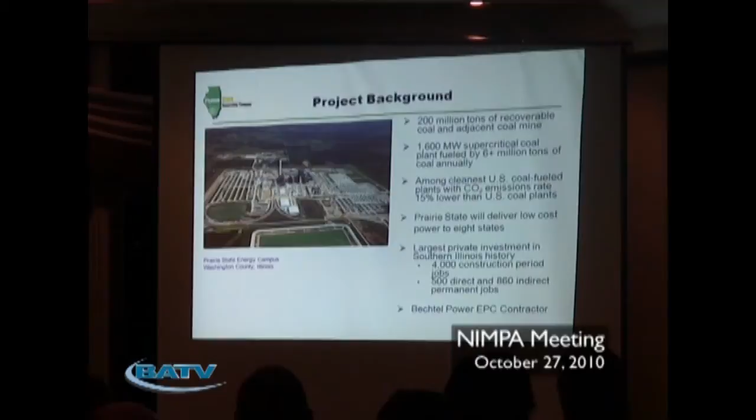As you all know, this particular plant is located in southern Illinois, and there are about 200 million tons of recoverable coal adjacent to the project. And like Mike said, it's a 1600 megawatt supercritical coal plant. It's fueled by 6 million tons of coal annually. And by the way, about 30 years worth of coal, we already bought it and paid for it, so it belongs to the project. So 30 years worth of coal is at locked-in prices, except the mining costs, whatever labor we need to pay, but otherwise the reserves cost itself is locked in.

And it's the newest power plant, and that means the EPA and others made sure that we use the latest, best available technology for taking care of the pollutants: sulfur dioxide, NOx, mercury, and then also the carbon itself. The only thing which we are not doing here is the CO2.

There are no technologies for CO2, and CO2 was not even considered a pollutant until recently. Even now, there's a lot of debate going on in Washington. What do you call CO2? Is it a pollutant or non-pollutant? But that's a debate for a different day.

Prairie State will deliver low-cost power to 8 different states. We got the partners. In the beginning, when we started talking about 10 years back, we thought that maybe about 70 to 75% of the project would be owned by Peabody, a coal company which was trying to build it in the beginning. But as time went on, things changed. I think 95% of the project is owned by public power, customer-owned entities.

This is the largest private investment in southern Illinois history. And actually, I think in 2009, this was the biggest construction project in the country. Not just on the power side, not just the electric utility side. It was the biggest construction project in the country, employing almost 3,000 to 4,000 people. When President Obama and others, in the unemployment time period, were injecting money to create employment, in Illinois it's created by 8 different states.

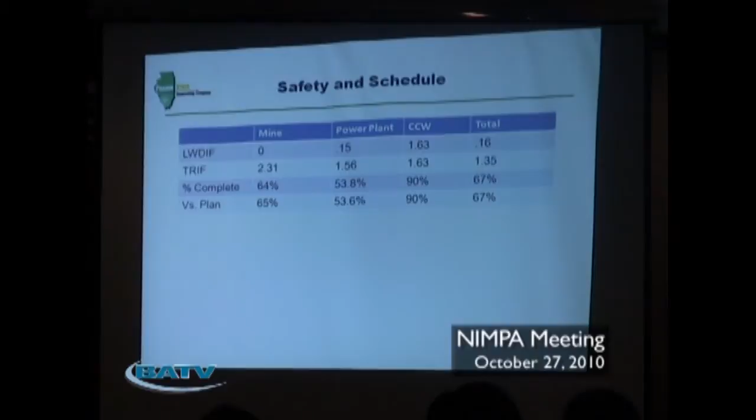Thank you. Starting from the high level, talking about safety and schedule, if we dissect the facility into the mine, the power plant, and the CCW management facilities, I have some statistics in front of you. Basically, from a safety perspective, the entire facility is being constructed with world-class safety statistics. I'm most proud of a couple of key points. The mine, since we started construction in summer of 2008, has been constructed without a lost workday.

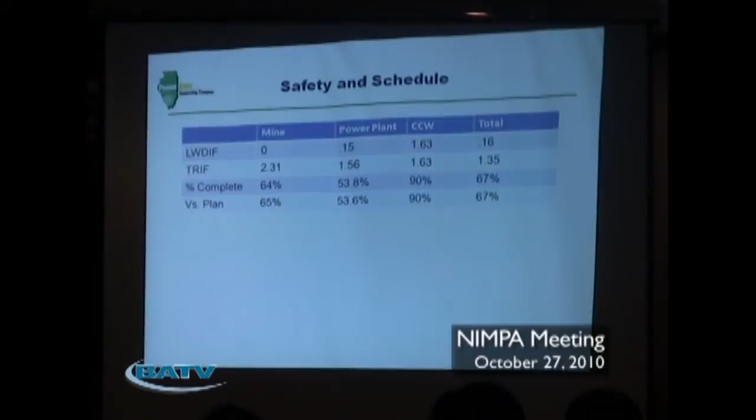The power plant, I'm very happy to say that Bechtel, under their leadership, they are approaching 5 million man-hours worked consecutively without a lost workday. They're at about 4.7 million man-hours consecutively worked, about 12 million man-hours total worked so far. And throughout the project, their statistics have been outstanding.

Their lost workday injury frequency of 0.15, that's against an industry average of approximately 2.0, so that's significantly less. Even the less intense injuries that are classified as recordable injuries, like someone has to see a doctor for an injury, get a stitch, or those type of things, their recordable injury frequency is running at a 1.56 against the industry standard for heavy industrial construction of approximately 6.0. So very good job there.

Our CCW facilities, our coal combustion waste management facilities, our landfill, are also being constructed, while not as labor intensive, with excellent safety. We've had one lost workday, and that was a contractor's employee who succumbed to some heat exhaustion symptoms and had to be treated by a doctor and couldn't come back to work right away. But I'm happy to report that employee is fine. So in total, the project that you guys are part owners, NIMPA's part owners, is being constructed safely.

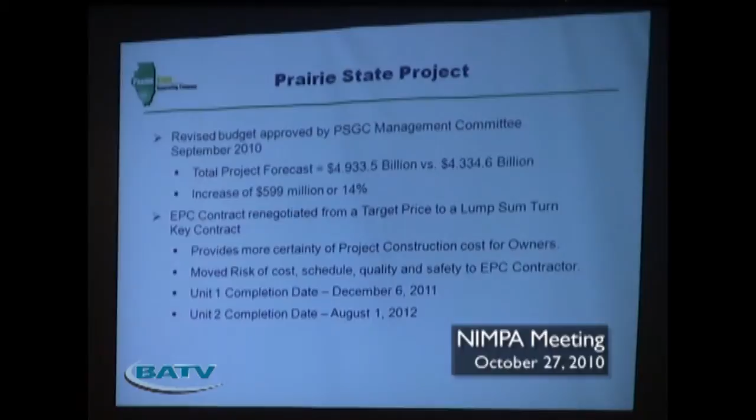The owners had all the cost and schedule risk, to a lump sum turnkey terms where now Bechtel has a lot more risk, and we think the risks are being appropriately redistributed when you look across the key points of the project. Mainly your interest is safety, quality, schedule, and cost. Those risks have been redistributed and the appropriate guarantees are in place as well. And so from an owner's perspective, it'll provide more certainty in project construction costs, and we move the risks of schedule, costs, and quality entirely to Bechtel. And in that agreement, we successfully preserved the completion dates that were in the original agreement of December 6, 2011 for Unit 1 and August 1 of 2012 for Unit 2.

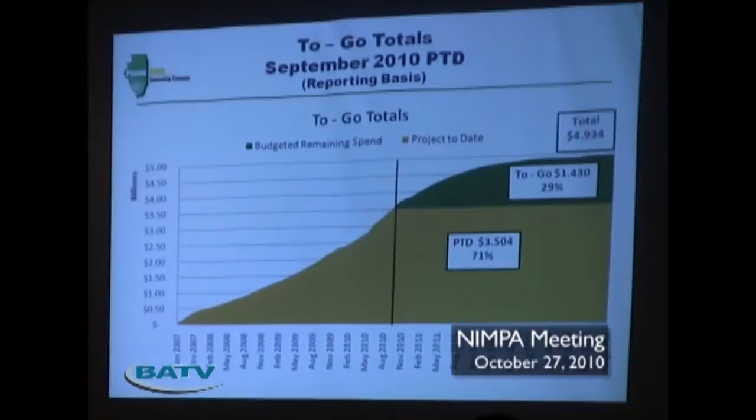And where are we in the project? If you just look at the cash flow curve for the project, and I was being asked about what are remaining risks in the project versus a lump sum turnkey. Of the 4.934 rounded projected budget or forecast for the entire campus, we've spent approximately $3.5 billion of that, and we have about $1.43 billion yet to go through the capitalization period of really late August of 2012.

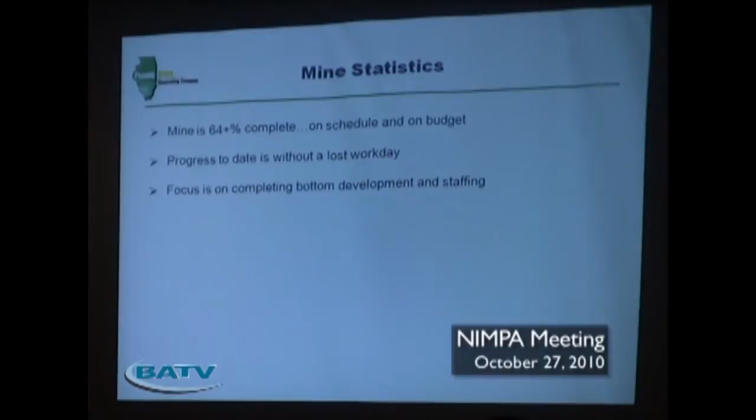Let me talk about the mine. As I showed you earlier, the mine is about 64% complete. It's on schedule, and it's actually under budget versus our original budget of 2008, and then more so on an apples to apples comparison on scope changes in 2009. It's under budget. And progress to date, again, as I said, has been without a lost workday. It's just outstanding. Our focus is completing the bottom development portion of the mine, or the underground construction work, and then obviously staffing.

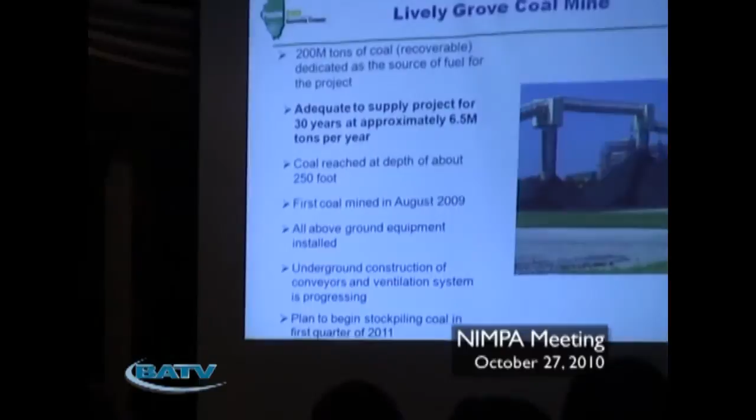This is a recent picture of the surface part of the mine. You've got 3 stacking tubes here, and we have about 300,000 tons of live storage capacity at the mine. As Raj said, the owners own the coal. That's a wonderful position to be in. You're not exposed to fuel, which is the largest variable cost in power production. You're not exposed to market derived pricing for fuel or the derivatives, like fuel adjustments and fuel adjustments for transportation.

The owners own a total of about 400 million tons of coal, but the way we're going to mine it, with room and pillar mining or continuous mining, will actually recover about 50% of that. And that 200 million tons of recoverable coal at a forecast usage rate of about 6.5 million tons is enough for 30 years of operation of the adjacent 1,600 megawatt power plant. The coal is at a depth of approximately 250 feet, and the seam is also ergonomically positive. It's a 6.5 to 8 foot thick seam.

So that means most people don't have to walk around bent over, except for Gary from Batavia.

The first coal was mined in August of 2009, and as I reported in September of 2009 to our management committee and some of the other owners, I was very pleased to see that we did find the coal. It was actually down there, so that's a good sign. All the above ground equipment is installed, and as I said earlier, our focus is on the underground work of installing conveyors, air shafts, and basically air ducting.

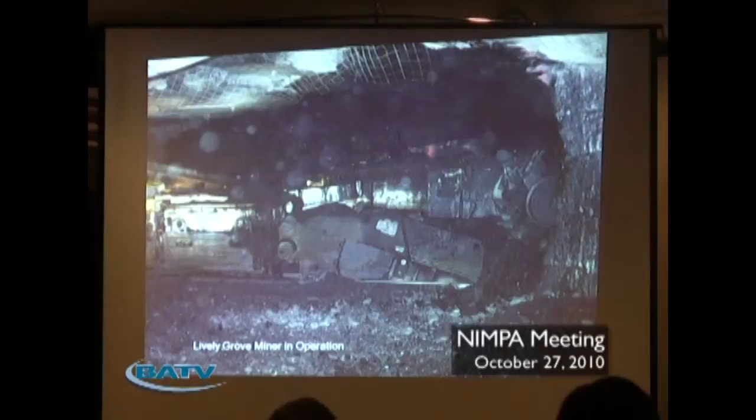This machine is about 37 feet long. It's about 11 feet wide. It can cut from the ground up to about 12 feet high, and it weighs approximately 75 tons. And there's 10 of them. They're big machines. They're actually quite exciting to see work.

There's roof bolts spaced, I believe, every 3 feet, and the screen already installed. And then where he's bolting a new area, the screen's already up there. He's standing under this hydraulic shield so that if a chunk of rock or coal was to fall off that part of the roof, he would be protected. And the same on the other side.

How this works is, first there's a hydraulic arm with an actuator on it that will spin a drill bit. The drill bit's hollow, and he'll drill a hole up through whatever remaining coal seam there is into the rock. We have a nice limestone and then shale roof, very strong to bolt into. And then he'll put a package of epoxy resin in there, and then run the bolt up in there, spin it, and it'll lock it in tight. And that glue will set in about 30 seconds.

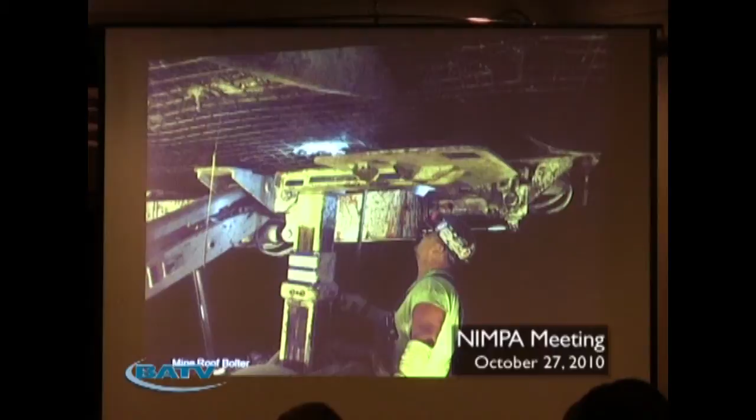This is a picture of the mine from early construction. We don't have the actual date stamp on it, but I can tell you from experience it's probably in July when we did the clearing and grubbing of the mine site. There's about 200 acres in fence at the mine. So I'm going to show you a series of progressive photographs over the last 2 years. This is a picture from August of 2009, so a year later you can see the progress that was made.

How we get down to the coal seam is via a slope. It's 2 levels. The bottom level is, I think, 12 feet tall, 22 feet wide, something like that, and is where we'll drive equipment and people in and out of the mine. The upper deck is where the conveyor is that hauls the coal out of the mine. That slope is at an 8-degree angle to the horizontal. It's about 1,645 feet long to get from grade down to the coal seam, 230 feet deep at the area where the slope is, where we call the 0 point.

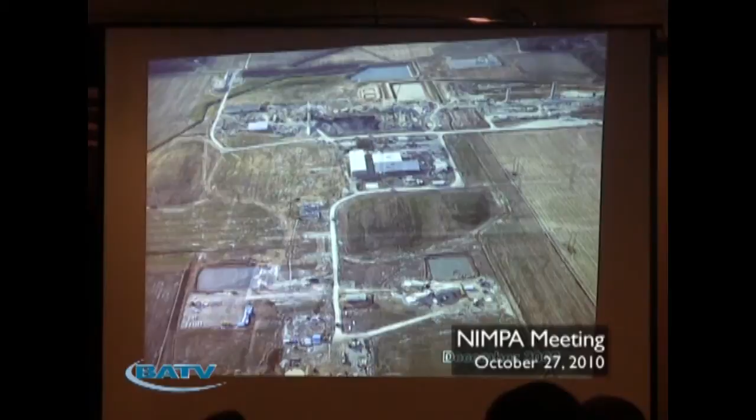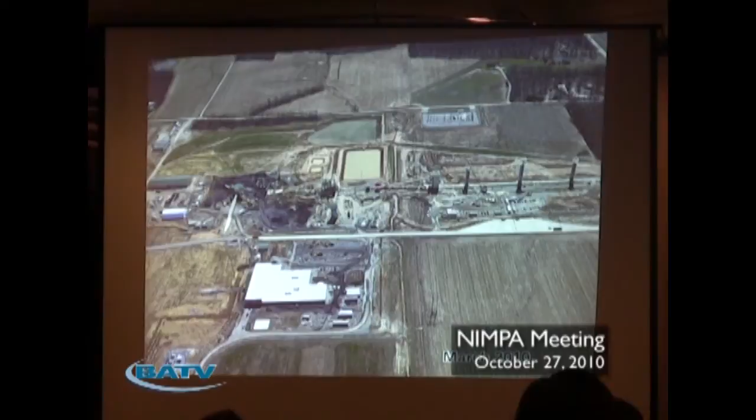By March of 2010, the office building's about done, and you really can see the surface work starting to take shape, and they are about done now. We're still mining coal as we're doing the surface and the underground work in parallel. And then August 2010, or currently, you can see the surface work is done. Just have to do some fine tuning, startup and testing.

The office building, which is primarily the front part here, with lockers and showers, and the warehouse and maintenance shop over here, is done. It's about 60,000 square feet. So that's a little overview of the progress of the mine over the last 2 years. And now I'm going to take you on a little tour of the power plant, what it's going to look like when it's done.

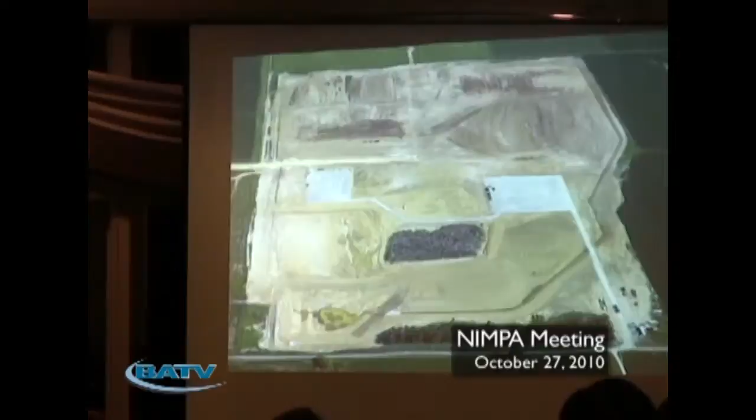Oh, no, that's not good. Oh, sorry about that. I swear it was working earlier.

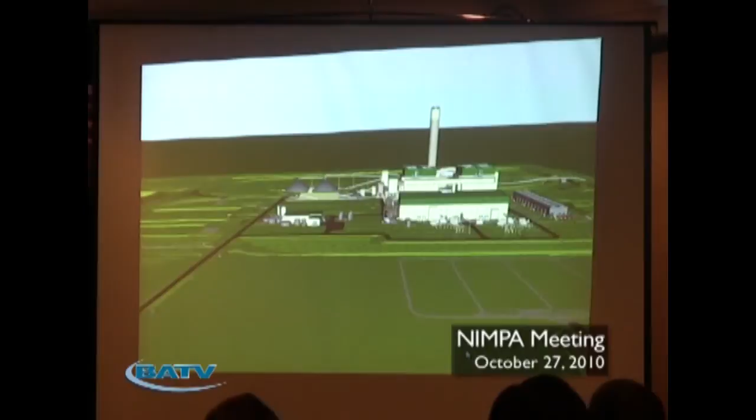Here we go. This is a 3D model, the Bechtel design model that was actually used as the power plant was designed, and for them to design construction sequencing. For those of you that came on the tour, you're entering the main entrance of the power plant along the south road. Inside the fence at the power plant, we have about 500 acres. Immediately in front of you, you can start to see the size of the live stockpiles of coal.

We'll have about 5 days live storage capability in the power block itself, and about another 60 days of what we call dead storage capacity at the power plant. Right in front of you is our raw water treatment plant. We'll have to treat over 25 million gallons of water a day that's used in the steam generators, but primarily used in the cooling towers.

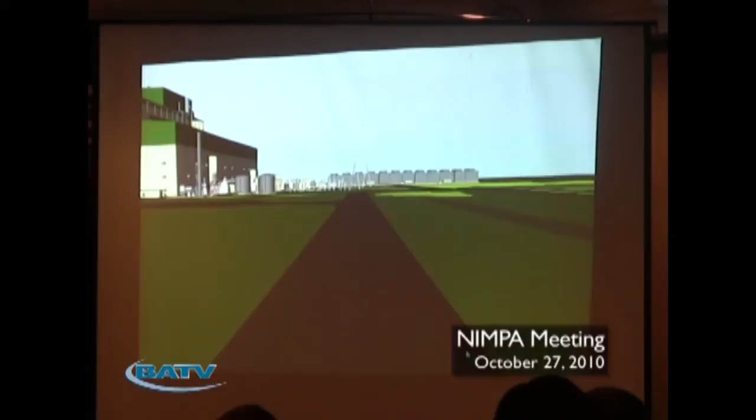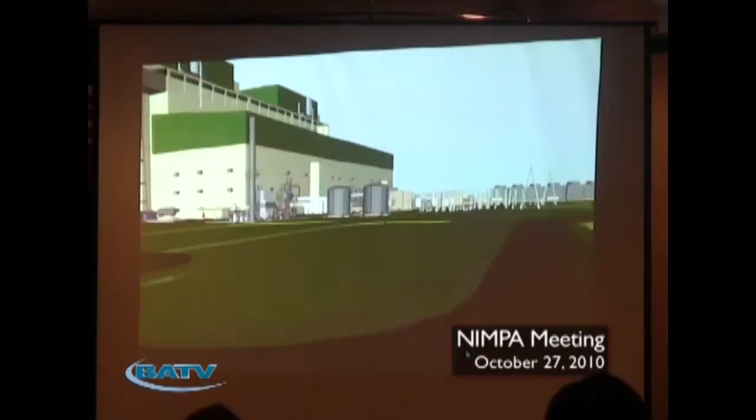So as we turn and look to the east, you can see the Unit 2 cooling tower here. And just for those of you who've been on a tour, it's about the size of a football field. There's 24 huge fans that'll serve for the air to water heat exchange process. You got to look at the power building itself, and these are demineralized water storage tanks. There's over 8 million gallons of storage capacity tank work on the site.

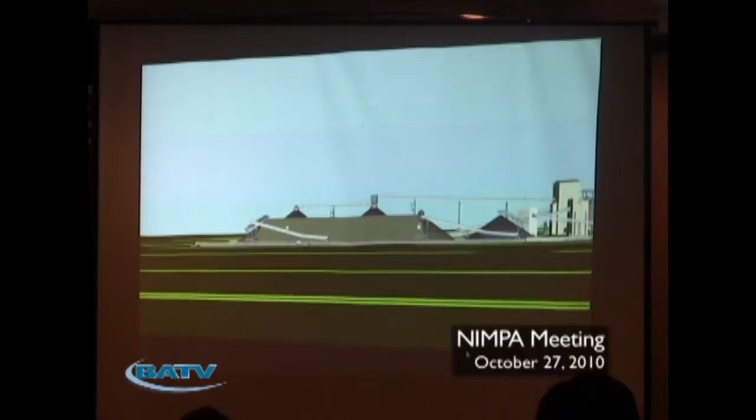As we look to the north, you can see more of our material handling area of the plant. It's quite big. This is the CCB pile. It's the coal combustion byproducts, bottom ash, fly ash, and gypsum from the desulfurization process. When burning 20,000 tons of coal a day, we'll produce about 11,500 tons a day of this product that'll be hauled off in rail cars, about a unit car train a day. These are chemical storage tanks, lime, acid, caustic, to be used in the water treatment process.

We're looking to the west. This is the raw water pond, and that's the pump house. It's about 67 acres on the surface, 55 feet deep, about 45 acres at the bottom. It holds enough water for 30 days, or just under 800 million gallons. It's a registered impoundment with the EPA, and so, for some reason, the Bechtel people call it a dam pond.

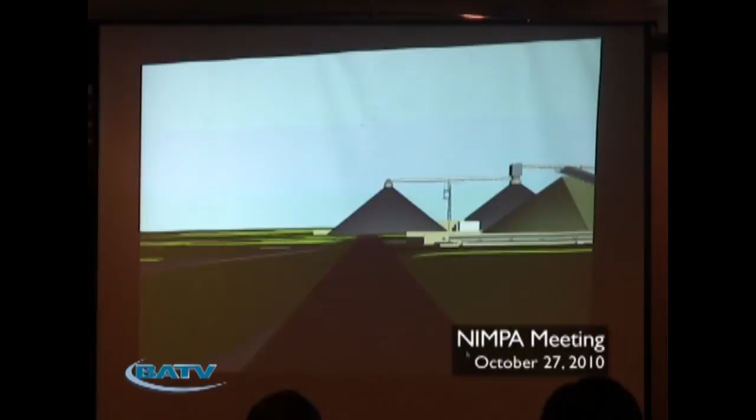We're heading north a little bit more, and you can see this video is a little finicky, so we can't go too fast, otherwise it makes us all dizzy. Most importantly, it makes me dizzy.

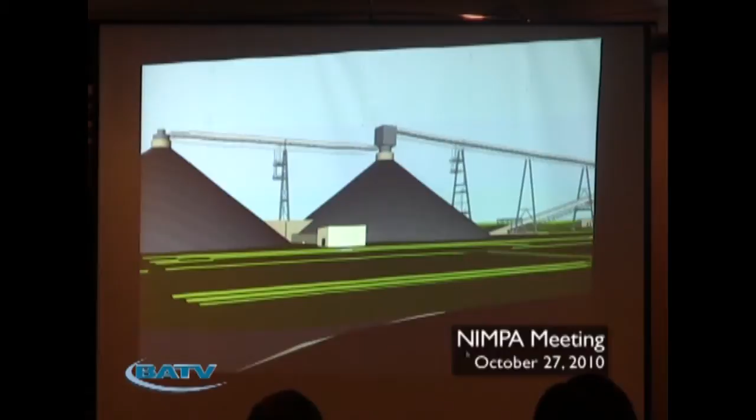Coal storage pile, reclaim tunnel, about 5 days of coal storage there, where about 2/3 of it can be reclaimed automatically via hoppers located in the ground here. Looking back to the east, we're going to go by the ammonia storage tanks right here. We're going to use anhydrous ammonia that's part of the selective catalytic reduction process to remove nitrogen oxides from the flue gas in the selective catalytic reduction, or the SCR.

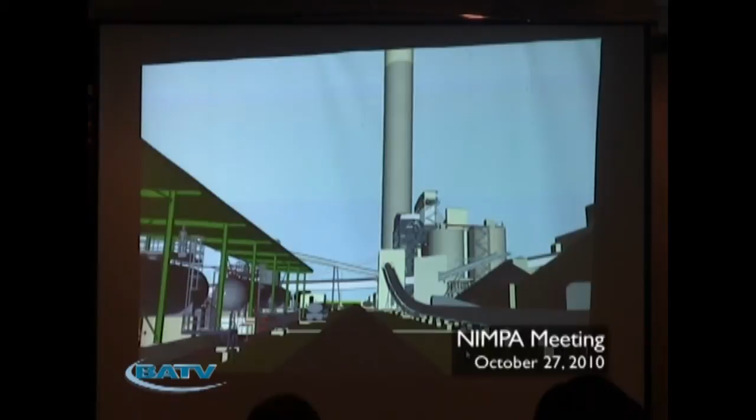Again, the material handling parts of the plant are substantial, and this is just to give you a perspective on the size of the awaiting CCB pile. They even test the operability and maintainability by drawing in operators and maintenance folks. We'll use about 1 tanker truck full of anhydrous ammonia per day.

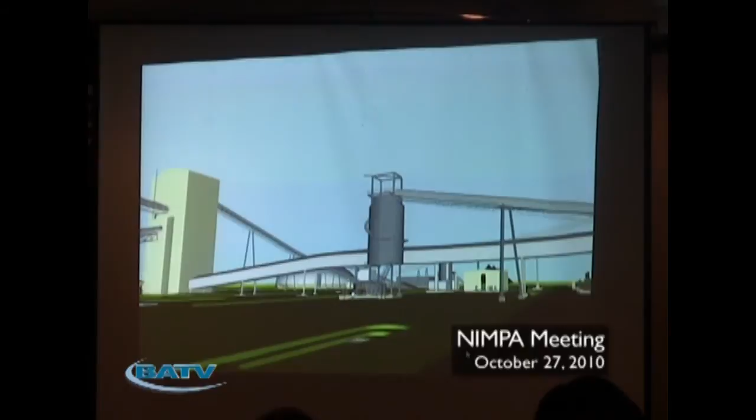Again, we're going to pan east, northeast. That's our limestone storage dome. So it's weather protected. We have about 5 days of storage of limestone on site that's used in the desulfurization process. We'll use about 750,000 to 1 million tons of limestone a year. That'll come in by rail, a few cars at a time, about 3 to 5 a day, and we'll unload it via bottom dump right here in this building.

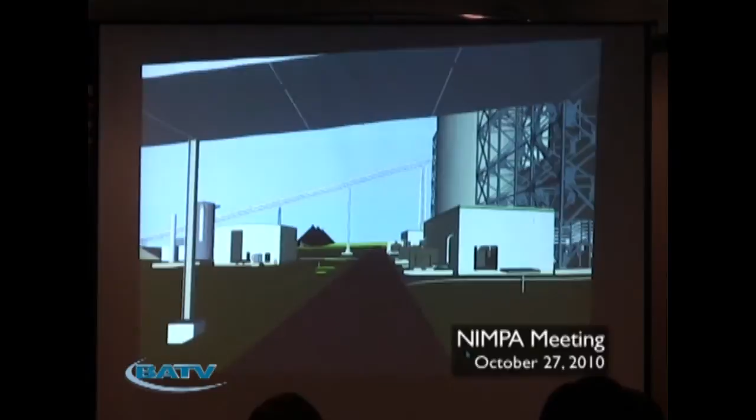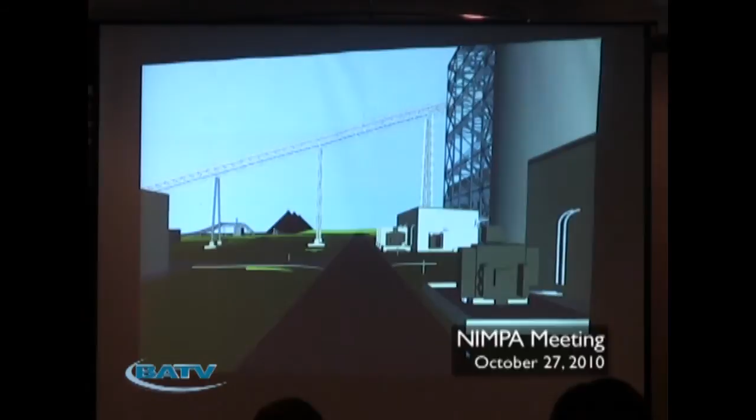As Raj talked about earlier, one of your advantages is the coal mine. You own the coal, you own the mine. Your variable cost of production of coal is well under market, and you're not susceptible to market driven pricing. You're not susceptible to being held hostage by transportation organizations, etc. Because the mine's located literally across the street from the power plant, and the coal will be transported across by a single conveyor with a capacity of about 2,000 tons per hour.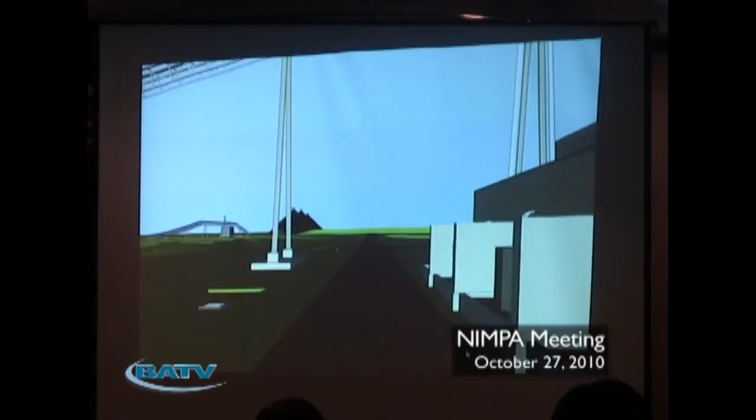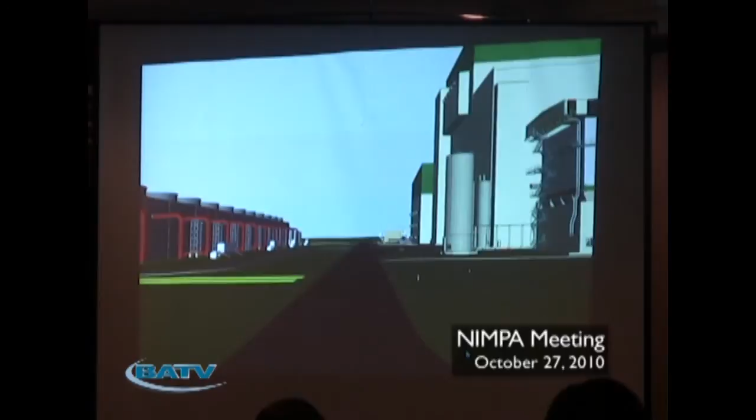Now we're going to turn and head south, and you're going to get a picture of the size of the cooling towers. This is the Unit 1 cooling tower. You can see that there's 12 risers there, each feeding a section with fans over 35 feet in diameter. Again, that's the size of a football field.

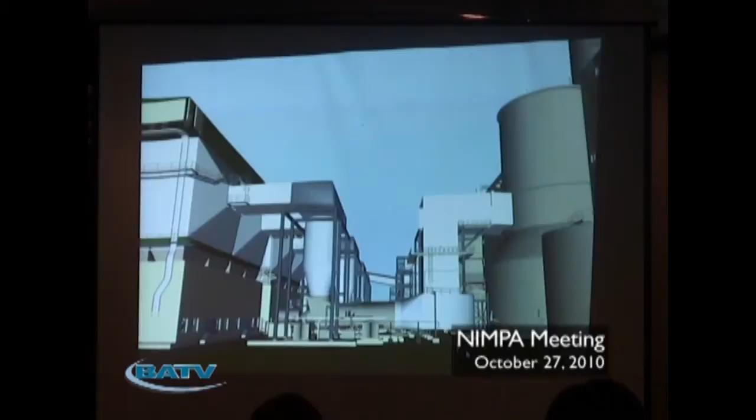The air pollution control equipment on the plant takes up over 50% of the power block, and it represents over $1 billion in cost. And this is what it looks like in the 3D model versus the rest of it. This is the electrostatic precipitator, the dry electrostatic precipitator. This is the wet scrubber, and the wet ESPs up on top. And you can't see the SCR, but it's in this building here, and it's close to 200 feet tall.

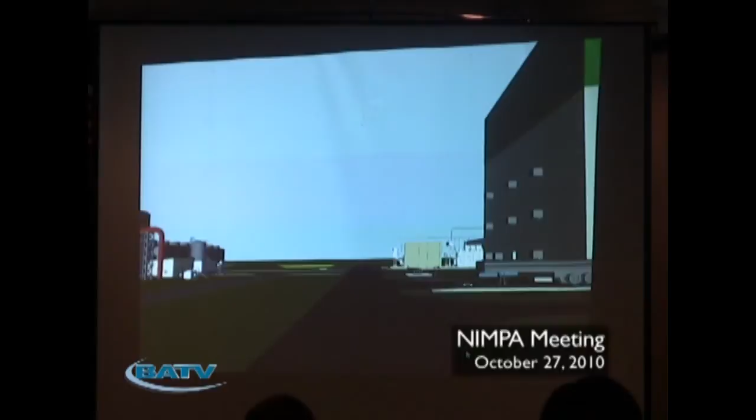And as we proceed along, this is the east side of Unit 2. I think I'm very happy as an operator as well that we have a spare main step-up transformer that the owners had the insight to purchase. There's many stories of plants going down for extended outages due to premature electrical failures.

Each of those transformers, the three main step-ups, and then the two generators, one in each unit, weighed in between 400 and 500 tons, and they were transported via heavy haul from the Kaskaskia River with a temporary port about 14 miles away. That haul took 2 days to go 14 miles.

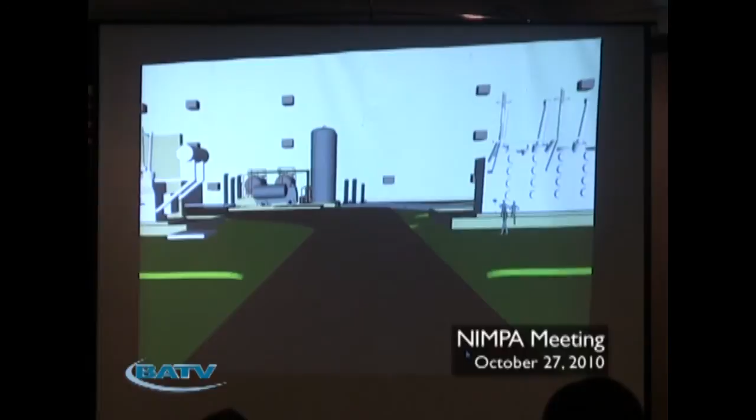You can see the switch yard, and I'll give you some more details about the transmission work that was done, but the switch yard is essentially done, and these are the step-down transformers. We generate at roughly 24 kV. That'll step it down to 4 kV to backfeed the plant. We'll use about 8 to 9% of the actual generated electricity to feed the plant.

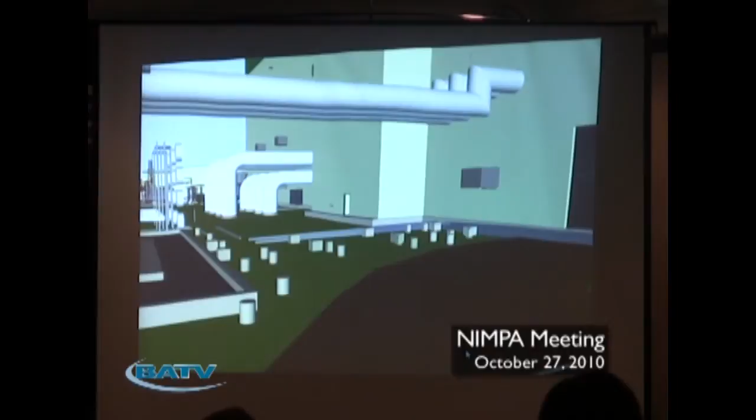You can see the circulating water risers. These are 6-foot diameter fiberglass pipes being fed. The underground pipes are 11-foot diameter steel reinforced concrete. Now I'm going to take you right into the turbine bay, and this is actually a maintenance door. You can see the tractor trailer parked there to simulate being able to haul something out of the lifting bay.

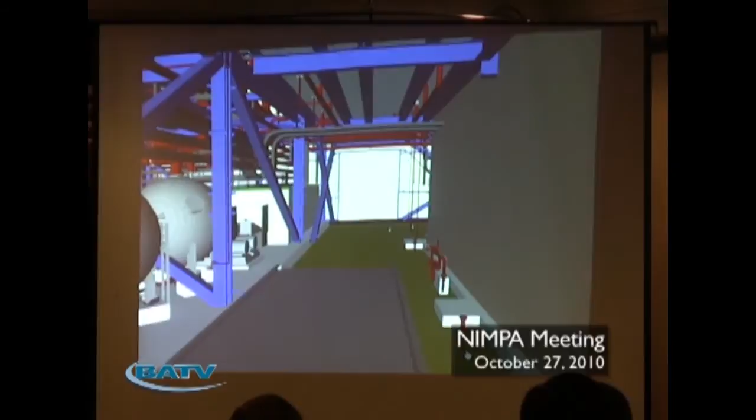We're a supercritical thermodynamic cycle, 3,800 pounds pressure on the boiler. Throttle conditions are 3,800 pounds, 1,054 degrees Fahrenheit. Running at that higher pressure means we need ultra clean water. So we have full flow condensate polishing, which were the 3 domes that you saw just as we passed in.

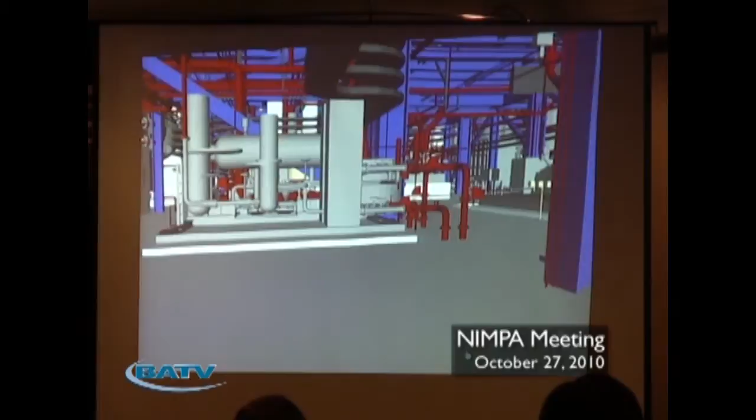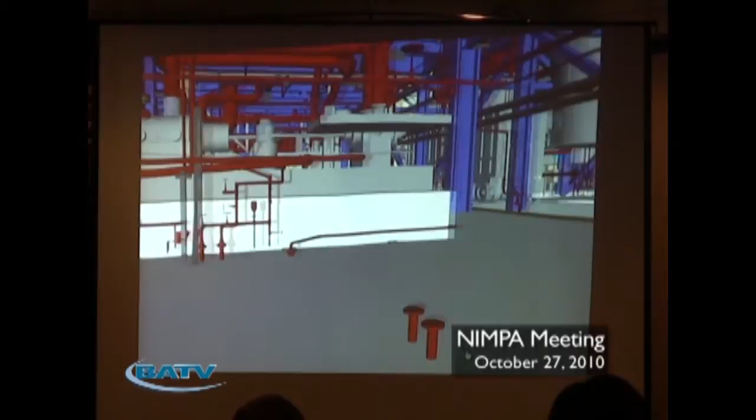Stator cooling water pump for Unit 1, and this is just a little startup boiler feed pump for Unit 1. It's an electric driven, several thousand horsepower motor. That's good for about 30% load, and there's one each for each unit. These are the turbine driven boiler feed pumps. They have an integrated lube oil skid. There's 2 of them per unit. Each is good for 50% load. And if you were to couple those steam turbines to generators, they produce in total about 30 megawatts per unit. They're big pumps.

There's Mike checking up on us. Look at that.

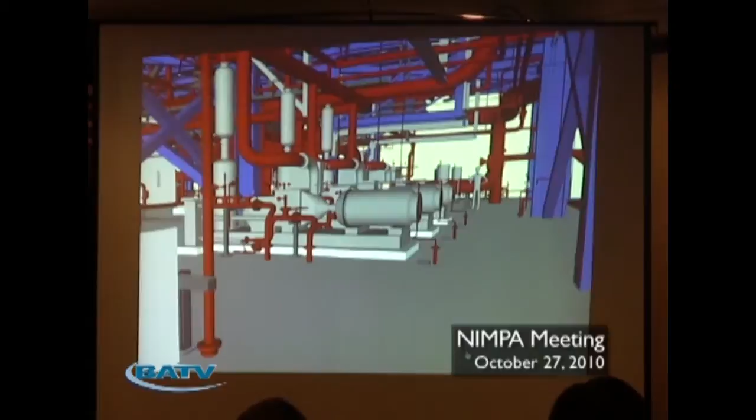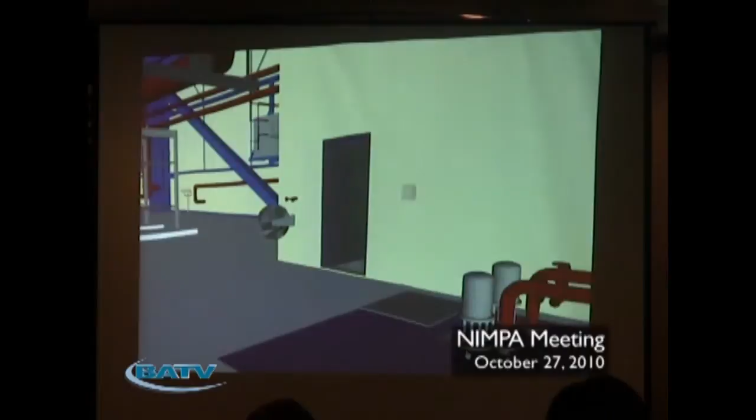And here's our vacuum pumps, Unit 1. So where we need assistance getting a vacuum off the condenser, we have 3 pumps to do that. Closed cooling water lines for cooling water systems, and then we'll see a plate heat exchanger, and then we're going to take the elevator up onto the turbine deck. Up we go.

I don't know if you noticed, but earlier on we passed a couple rooms, and you notice the model actually shows the doors open, so that when they're planning the construction of the equipment and the equipment placement, you don't get into an interference situation.

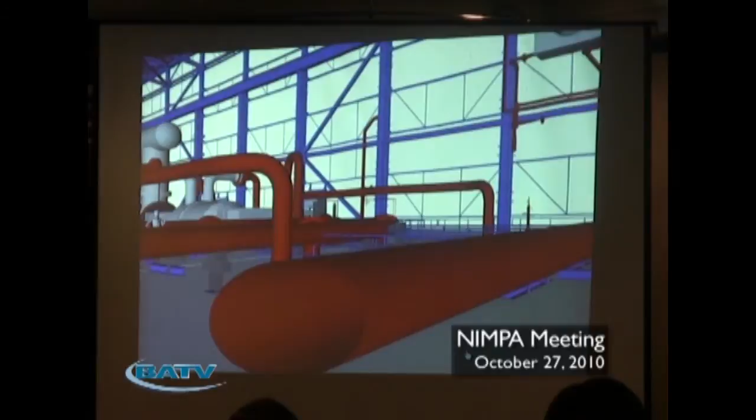We just walked off the south end of the feedwater deck for Unit 1. See the high energy piping, and it's a combined turbine bay that has both turbines and generators for both units on a single bay. We have 2 turbine cranes, each fully capable of moving the heaviest component. You can see the high pressure turbine at this end for Unit 1.

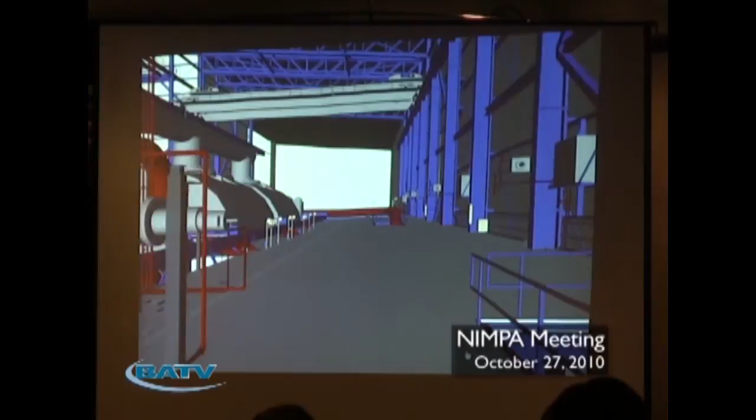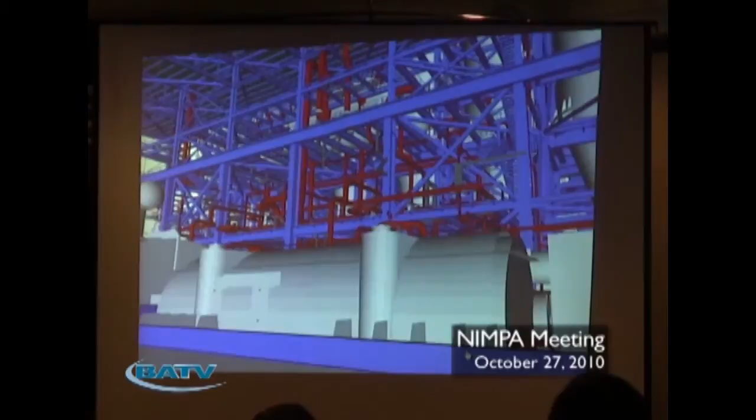Steam will go into that turbine, like I said, at 3,800 PSIG, 1,054 degrees Fahrenheit. Go back to the boiler, be reheated to 1,054, go into the intermediate pressure turbine, and then into the 2 low pressure turbines here that run in parallel flow. Directly coupled, I think there's 10 bearings on this machine, to the generator that has a water-cooled stator, hydrogen-cooled rotor.

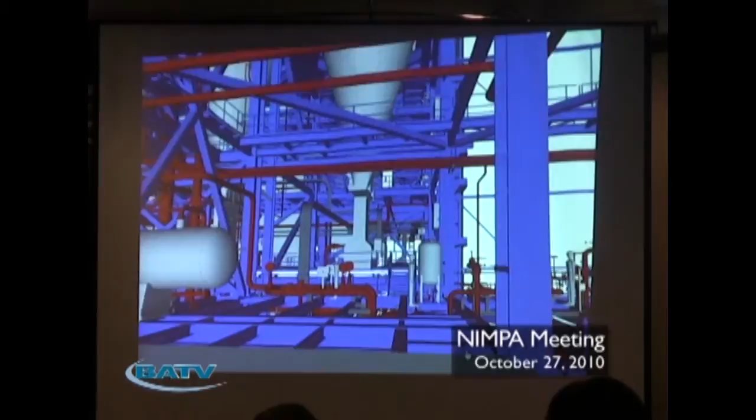Just again, you get the size of the place. Each unit has 6 coal silos feeding 6 coal feeders, feeding 6 pulverizers. We can make full load on 5 pulverizers, so we can have 1 out of service for repair and maintenance. And in that configuration, each pulverizer has to process a little over a ton of coal per minute.

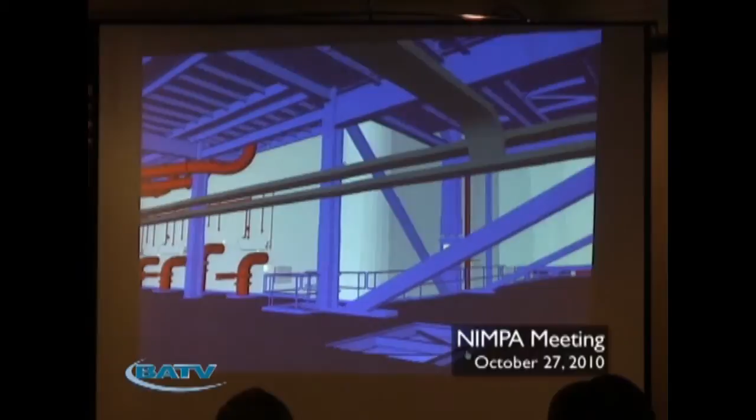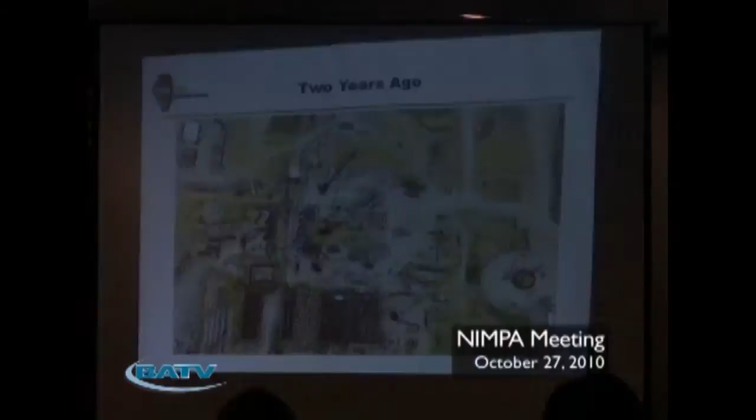All looks pretty basic, series of boxes and some steel and pipes, right? And this is the boiler, just a big box with some pipes sticking out of it, right? Well, for those of you that visited, you know it's a little bit more than that. And thank you, that cooperated.

This is a picture from 2 years ago. Picture of the Unit 1 boiler building foundation being installed. You can see this little grass growing in here, but if you make out the little specks, there's over 7,500 60 to 80 foot long H-piles which serve as the foundation for the plant that were driven throughout this area.

This right here is the foundation for the stack. That's over 5,000 yards of concrete in the ground right there. Here's the 11-foot diameter steel reinforced concrete circulating water piping that's reached over for Unit 1's condenser.

1 year ago, you can see the remarkable progress made in a year. Turbine building steel is going well. In Unit 1, boiler steel's topped out. Those yellow boxes on top are a computer-controlled integrated lifting system called a strand jack system, with up to 9 winches computer-controlled to lift super heavy pieces up into the unit to allow modularization.

That's Elmo in that configuration. That crane, I believe, is good for close to 600 tons at 400 feet of boom.

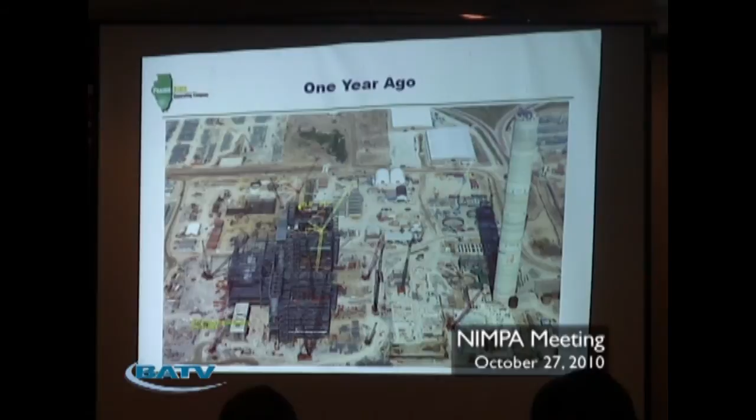Air pollution control equipment is going to go in here, and you see the stack. We've talked about this before. That's 684 feet, 4 3/4 inches of concrete, about 9,000 yards total that's poured one wheelbarrow at a time.

And today, you can see the cooling tower, Unit 2's cooling tower is done. The air pollution control equipment, as I said, is starting to fill up all that space. The dry ESPs, as you saw, and in the model, there's steel that's left out of here so we can put the ESPs in place because they're big and tall, and then we'll build the steel around them and close in the building.

Wet scrubbers, and you can see the wet electrostatic precipitator, the frame of it's already in on Unit 1. Turbine buildings enclosed, both turbine generators are in there. Unit 1's almost ready for lube oil flush.

Here's the water treatment building. Again, I think this is $40 million worth of water treatment equipment, basic reactors, clarifiers to handle a little over 25 million gallons a day. And then we get into some high-tech reverse osmosis equipment in order to make the demineralized water for the steam generators.

As I said earlier, we're very proud about our safety record. And the way Bechtel and Prairie State's been doing it is we get everybody engaged from the leadership down to every craft worker on site. And with the owners, we believe that all accidents are preventable, and we're really trying to prove it.

And this is a picture of the craft stewards from each discipline that have taken on leadership roles in helping propagate our safety culture and that belief that we can build this plant without an accident. And Bechtel has also stood up and is rewarding people individually and not just in groups. There's a picture of 3 Boilermaker general foremen who have worked 6,000, 7,000, and 8,000 hours on this project without getting hurt.

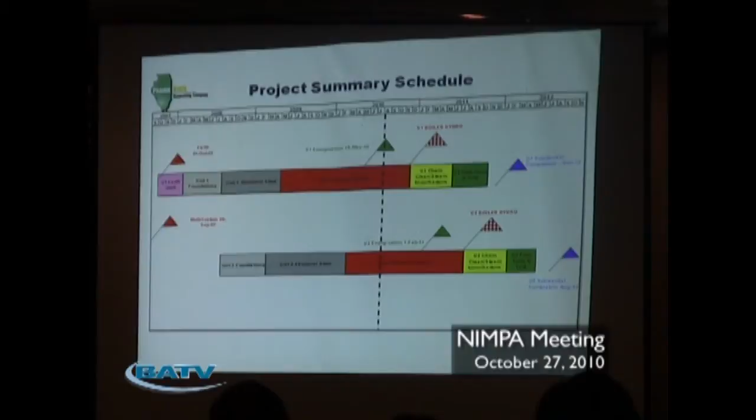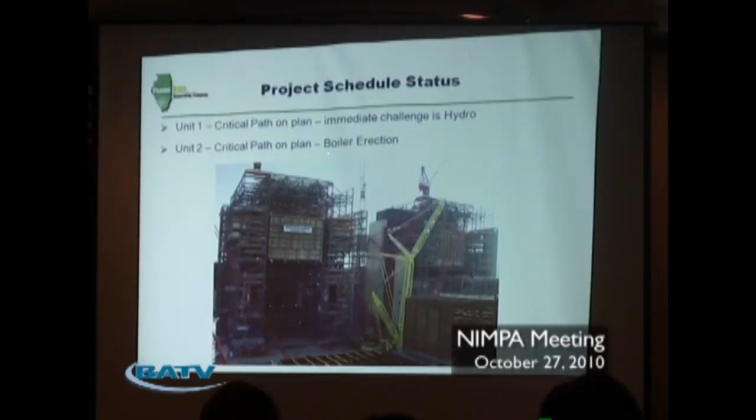Within that boiler erection, you got 2 key points. You have the weld out of the tubes, and you also have closing up the gas path. And the immediate challenge when I put this slide deck together in late September was the boiler hydro. But Bechtel's made some significant progress on that. So there's actually about 30 days float in that part of the critical path, and now the real critical path is the gas path complete. Unit 2's critical path is only slightly different. It's gas path tight.

How are we doing on quality? Well, starting with a partnership with all the building trades that includes comprehensive drug testing and pre-testing, Bechtel's quality program is doing very well. As it says here, the weld acceptance rate, and for those of you who look at the glass as half empty, the reject rate of tested welds is under 2%. It's actually 1.4%, which is extremely good in this industry. An industry average number is more in the 5 or 6% range.

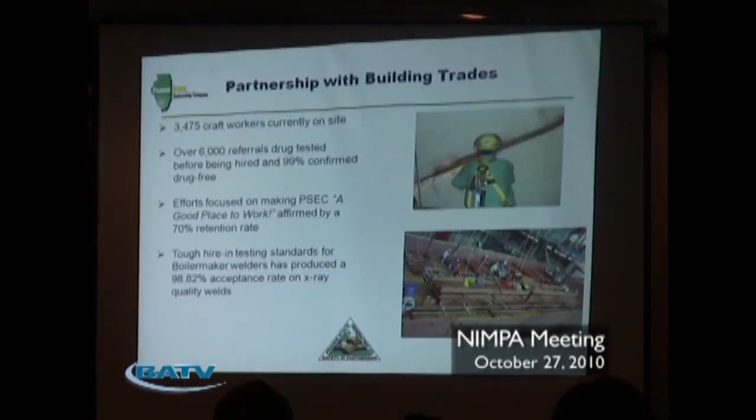Okay, I kind of gave you general points, a high-level look at the power block, and I'm going to give you some details just showing you how complicated and sophisticated this is. It started with the prefabrication in the fab yard.

As John was asking me how much laydown area you had on site, it's about 300 acres total, and this is over 50 acres of it here, and these are just boiler parts for units 1 and 2. So critical path for the project started 2 years ago in this laydown yard, and this is a prefabrication yard here and here before the parts are actually put into the boiler building.

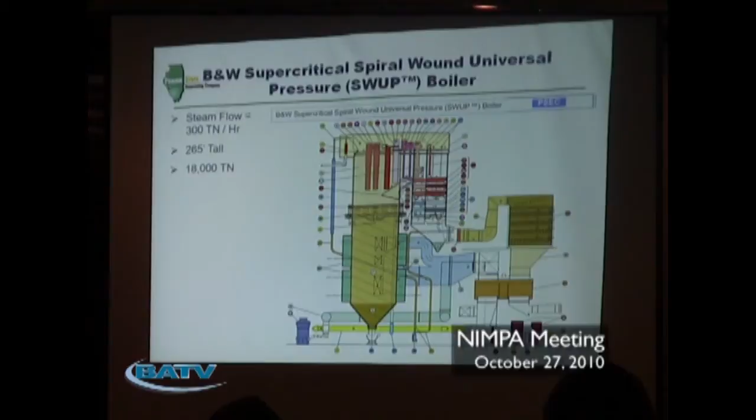The boilers are big and they're complicated. Each boiler will put out over 7 million pounds of steam an hour at 3,800 pounds, 1,054 degrees Fahrenheit. Each boiler is over 265 feet tall, weighs over 18,000 tons and has over 32,000 tube welds, which further complicates it. They're called spiral wound universal pressure boilers. It is a spiral wound design in the furnace, which makes them highly reliable and gives better turn down for operations, but they're more complicated to build.

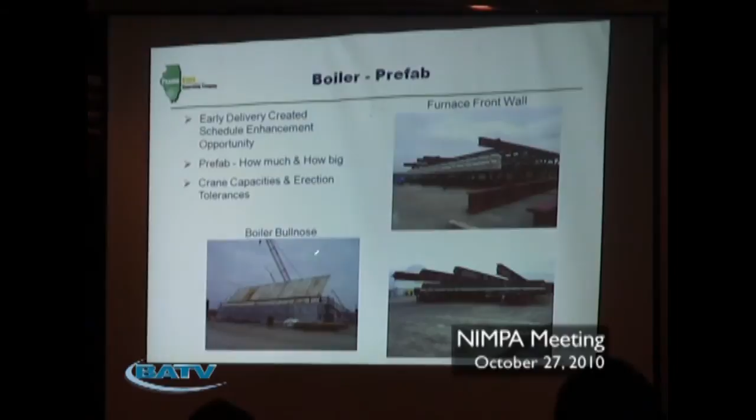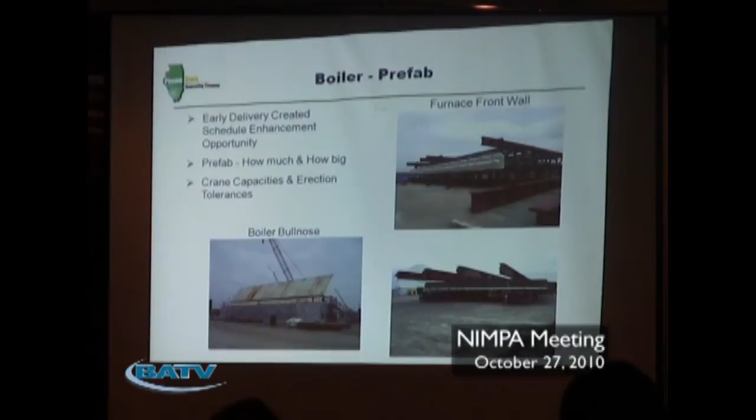We started with deciding how much prefabrication to do, and these are some pictures of sections of the boiler being prefabricated and getting ready to go in the building. This wall right here is over 100 feet wide, 60 foot tall and about 400 tons. And this is what it looks like being hung up in the furnace. Our largest lift on the upper furnace section was about 285 tons using those strand jack systems that I pointed to earlier.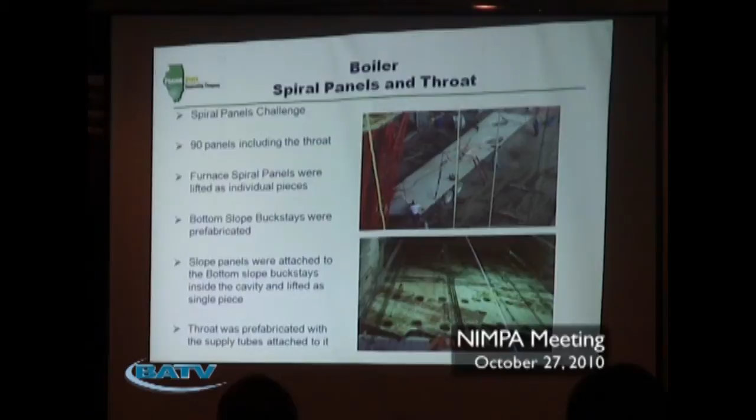Still in the boiler, we have those spiral panels to put together. They're 1.25 to 1.5 inch diameter tubes, about 0.4 inches thick, and they're 1 1/4 chrome material. So fairly difficult welds to make, and I think there's 6,000 or 9,000 of those type of welds to make in each unit. And there's over 90 panels that have to be installed. So they're big, they're bulky, and they have to line up.

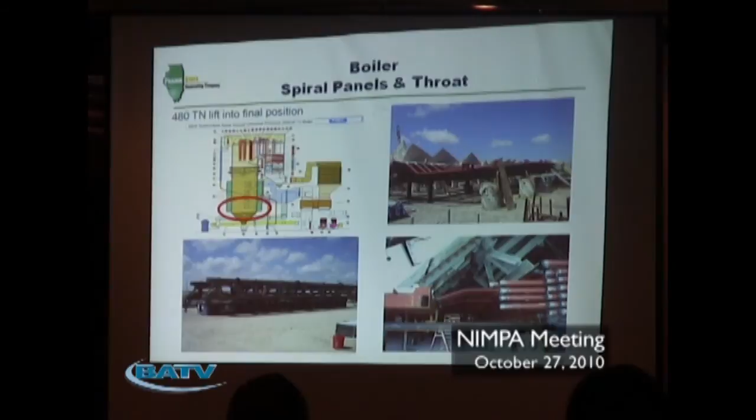As we finished the bottom of the furnace, we prefabbed about 480 tons of a complicated section of the furnace and then lifted it all into place. If you can imagine, a lot of those tubes are on an angle, and you got these 1 1/4 inch tubes that have to line up with the other ones, and they did. After you finish the furnace, we have to lift over 1,340 elements into place and weld them out.

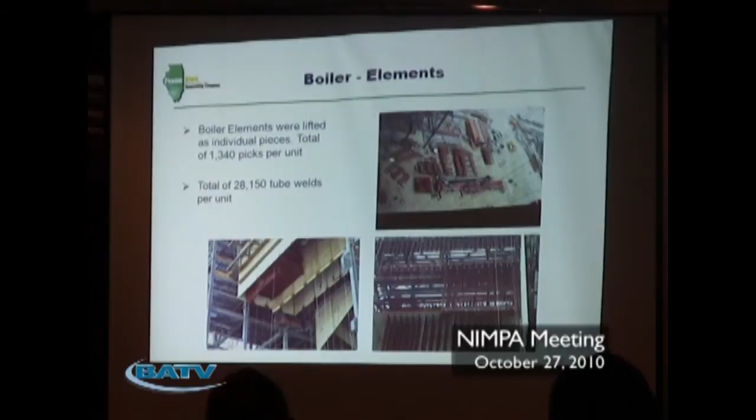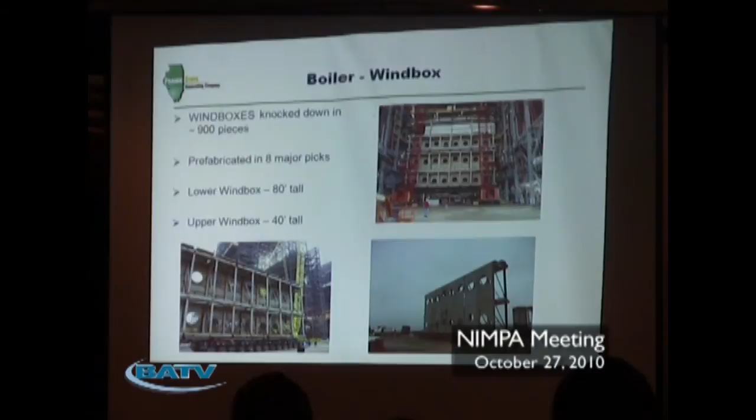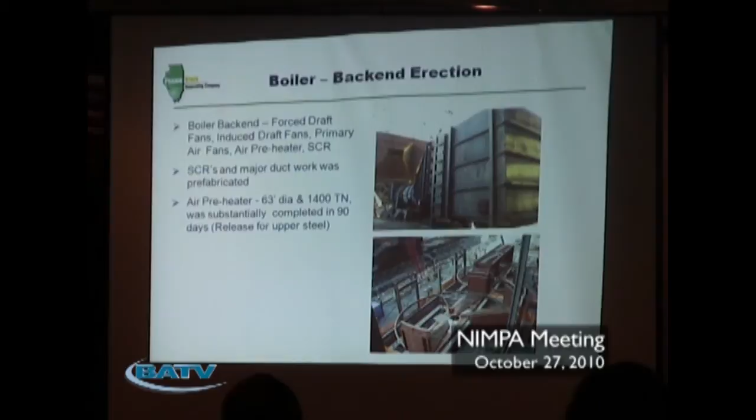And then you start putting the appurtenances on the boiler, the wind boxes, over 900 pieces, prefabricated into 8 sections that were lifted, and some of them were 80 feet tall by 100 foot wide. After finishing the boiler, we work on the back end equipment. We have ductwork, fans, and air preheaters to install. For those of you familiar with power plants, air preheaters: you got a 63-foot diameter, 1,400 ton machine rotating on the shaft here, 2 of them that have to be installed in each unit.

Raj mentioned the air quality control equipment earlier. One of the prominent pieces is the selective catalytic reduction equipment, or reactor. Each one on each unit weighs over 325 tons; I think they actually total a little over 500 tons. Those were pre-modularized into 3 pieces in the laydown yard, walked over on heavy haulers, and the largest piece, the SCR itself, was lifted into place with 2 600-ton cranes with their winches computer synchronized, lifted 135 feet in the air, walked 125 feet, then lowered into position, placed within 1/16 of an inch of their intended position.

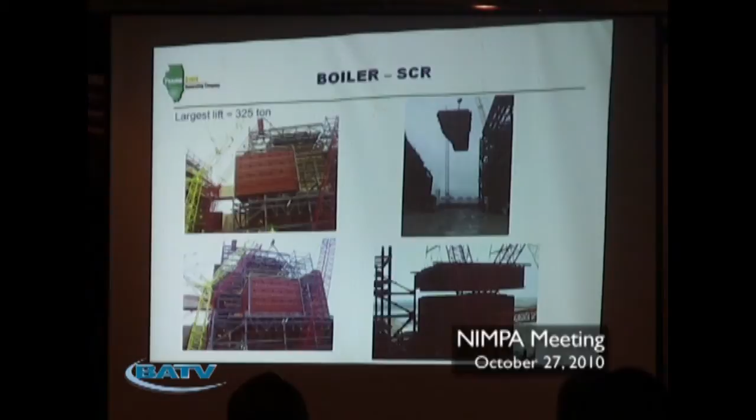The dry ESP, each dry ESP is huge. It's almost 2,000 tons of equipment, and it's not just a big box. There's over 5,700 electrodes and 700 collection strips per unit that have to line up inside to permit the gas flow at a certain pressure drop through there and collect that dust.

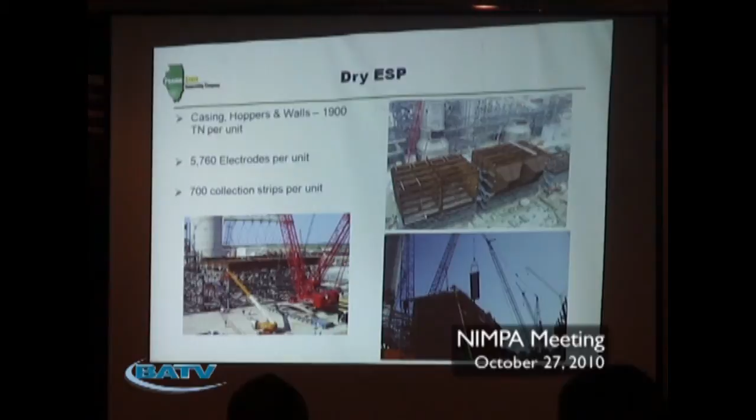The scrubbers are big and complicated. They're an exotic alloy, steel that's 6% molybdenum for its erosion and corrosion resistance, and it takes special welders to weld that up. An 84-foot diameter scrubber module built in 21 rings, over 720 tons a piece, and a whole lot of pre-modularization was done there as well.

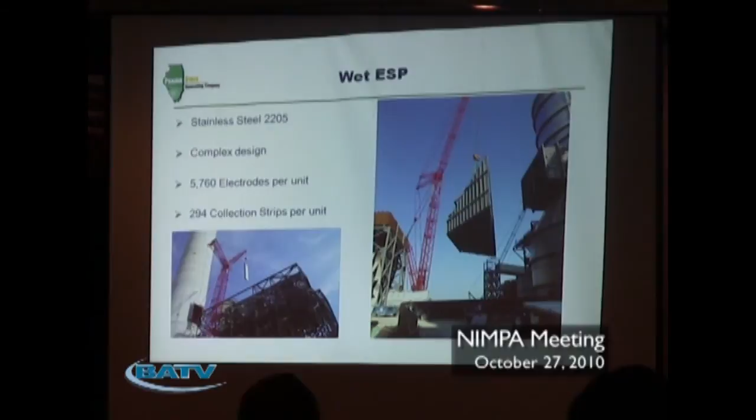Then you have the wet ESP. It itself is an exotic stainless steel. It's a complicated design, and it's work that was done on the ground to reduce the amount of work done at elevation and improve productivity.

Then we start talking about other pieces that have to be put into the plant. I mentioned the 400-ton transformers. The condensers, 2 condensers, each of them arrived by rail with about 350 pieces that were in the laydown area. We put 350 pieces together, including the feed water heaters. There's 2 feed water heaters in each one, right there.

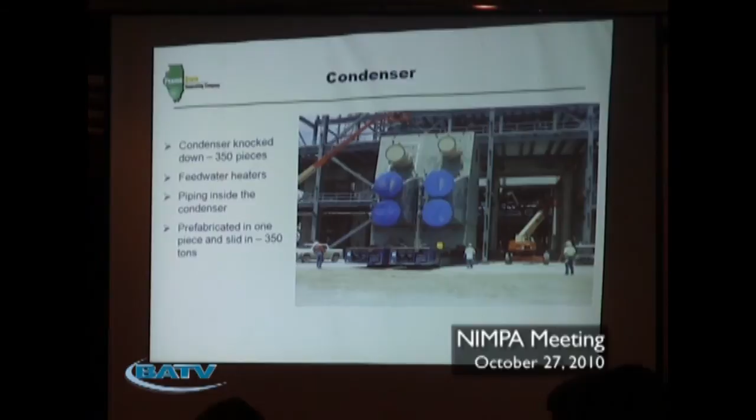That's the piping, the circulating water piping that goes in. They're pre-assembled and then walked by these heavy haulers across the site, slid in under the turbine bay, and put on awaiting anchor bolts. So a lot of big work being done, and done to very finite specifications. So, done talking about the power block.

Talk about transmission. There's over 38 miles of transmission upgrades that are associated with the Prairie State Energy Campus that we're looking after very closely. It's being built by Ameren. You all fund it, and then they reimburse you for it.

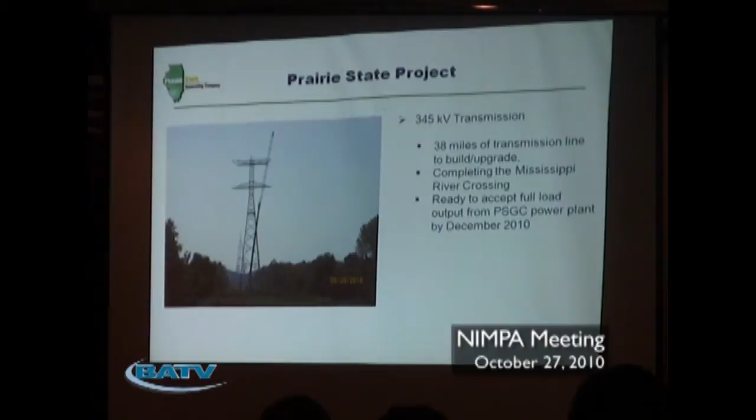There's a 1-mile and a 7-mile line that directly connect our switchyard to the grid, and then there's a 30-mile 345 upgrade from the Baldwin Station switchyard over to Rush Island, so that involves a crossing on the Mississippi River. And this is a picture of a 600-ton crane boomed out to reach the top of those 440-foot towers.

Here's some pictures of the river work being done. We actually shut down barge traffic on the Mississippi River for 2 days a couple weeks ago to pull the wires across with a helicopter.

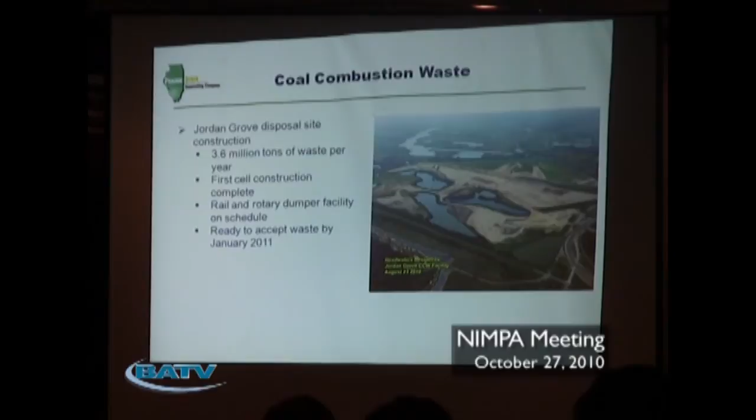Then we have the landfill, or the coal combustion waste. We have over 1,200 acres there. And we have a little over 2 years' worth of disposal capacity already constructed. And this is an aerial of that area you can see here. So we have a stage. Our folks have a very detailed plan for that. And that's a picture. We're going to have to unload 100 rail cars a day, and turn them around and send them back to the plant.

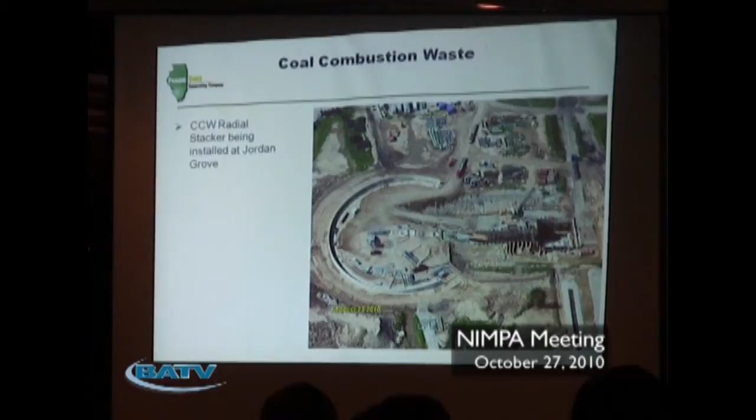With that, do you have any questions? Yes, sir. What are your concerns regarding security? As far as physical security, we run a very tight ship, both at the power plant, the mine, the CCW facility and our training facility. And as far as cybersecurity, we are also guided by some FERC and NERC guidelines for that as well. But we run a very tight ship. We get over 1,000 attacks a week, and we haven't had one get into us yet.

Yes, sir. What do you do with the coal burning byproducts? The coal burning byproducts, which are fly ash, bottom ash, and gypsum from the desulfurization process, those are commingled, run through a pug mill, hydrated a little bit so that they're not a dust problem, and put in a rail car and hauled to landfill.

Some people have asked, well, why don't you sell it? I've heard of selling gypsum, all that stuff. We're landlocked. Just the fundamentals of the gypsum market haven't supported marketing that yet. I'm pretty versed in that; we did that in my past life. But with all the scrubbers coming in along the Ohio and Mississippi River, basically the supply has doubled for the gypsum market and synthetic gypsum. And demand has not doubled.

We didn't like it, paying a little more money to Bechtel, but at the same time, we saw the prices increasing; we were watching in Indiana. And IMPA, we have ownership in Trimble County Unit 2, another project just coming online right now. It's the same size of unit, and Bechtel had an EPC contract, so we were watching the price, what's happening there, and what is the new project in that state.

This is where Mike Buffington and the other board of directors, including me, concluded: let's go back and have this EPC contract where we're locking in, and we know what it is. We don't need to worry about it every month, every day. It was going up every day, every month. Every month we get up and we say, Bechtel, what's the price? Oh my God, oh my God.

The productivity is not doing as well. The construction is not doing as well. We were nervous and we wanted to lock in. That was one of the reasons why Peter was talking about negotiating the contract and locking in. And now we know our total cost. Maybe within $20–30 million, but 99.99% of our expenses exactly. I'm glad that we were able to do this project.

Any other questions? Did Bechtel incur any consequences for their misestimations and their poor productivity and all that? Not under the original contract structure, but under this contract structure, that's all their risk. And their other downside was reputation.